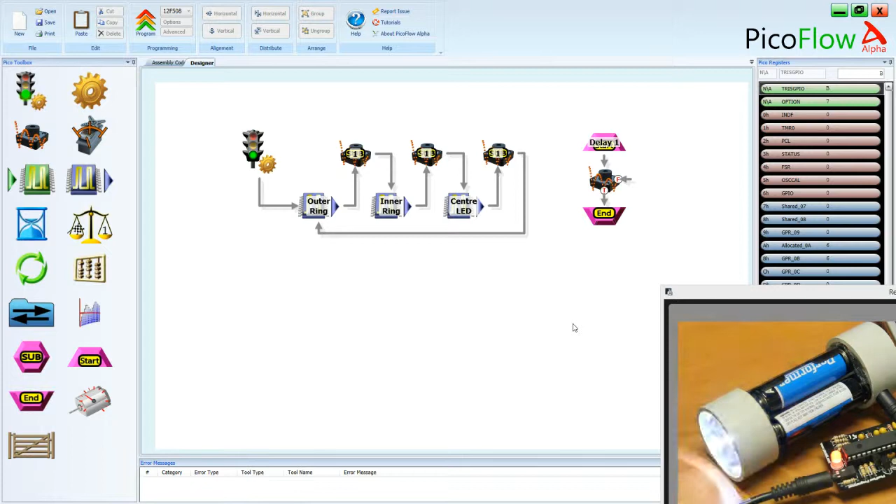Welcome! This is tutorial 5 on the Pico Bright, and today we're going to have a look at how to put a switch in a subroutine instead of a delay. So let's open up the previous code that we used, tutorial 4, where we put a delay in a subroutine.

So putting a delay in a subroutine, as we said last time, has a great effect of you being able to update all of the tools at once. So we've got 6 delays up there, or 6 subroutine tools, and they all call this one delay. Now, in that subroutine, each time it gets to the end, it returns to the respective subroutine that called it.

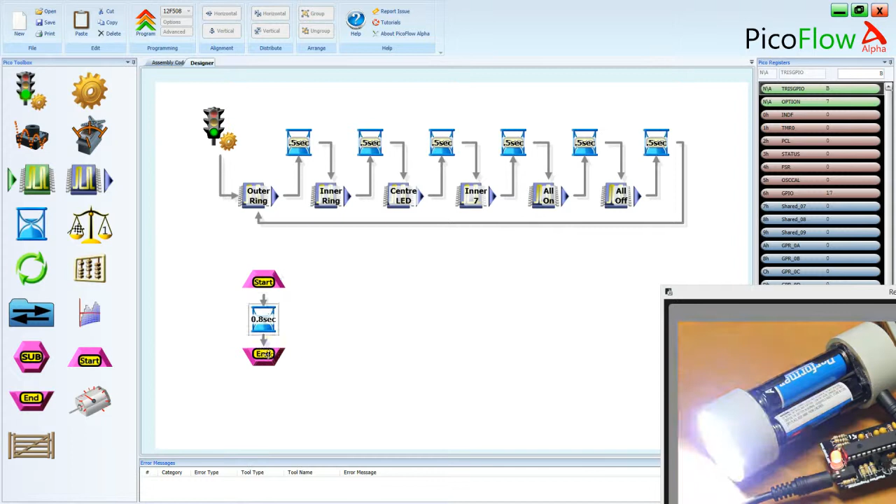And the thing that enables an MCU, a microchip, to work like that is it has a thing called a subroutine stack. Every single tool has an address, so the address of this call is put on the stack, and then it goes to the new address of the new tool, and it gets to this return or the end tool, and it says, okay, let's pop that address back off the stack, and then it sends it back to this address. And so each time it gets to the different subtool, it lists that subtool's address on the subroutine stack, and so it knows how to return to that subroutine that called it.

Okay, but let's have a look at our switch tool. Now this switch tool is pretty handy. It can be set up a couple of different ways. The way we want to set it up for this one is as a stopping switch, which means it's going to stop on the switch, and when the switch changes state, that's when it actually goes on to the next state. So instead of having a delay, it's going to be an infinite delay until a switch is pressed. So we can hook that up, and we'll hook up the bottom one.

Now we need to change the false and true around, because true means that it has changed states and false means it hasn't changed. So we'll put false on the left and true on the bottom, and we're using RB3, so that's right, and we'll look for a switch press. No, switch release actually works better. Normally when you click on a switch, it's when you release it that it activates. So we'll use switch release, and we might just give it an annotation and say RB3, because that's the switch we're using, or the pin of the microcontroller.

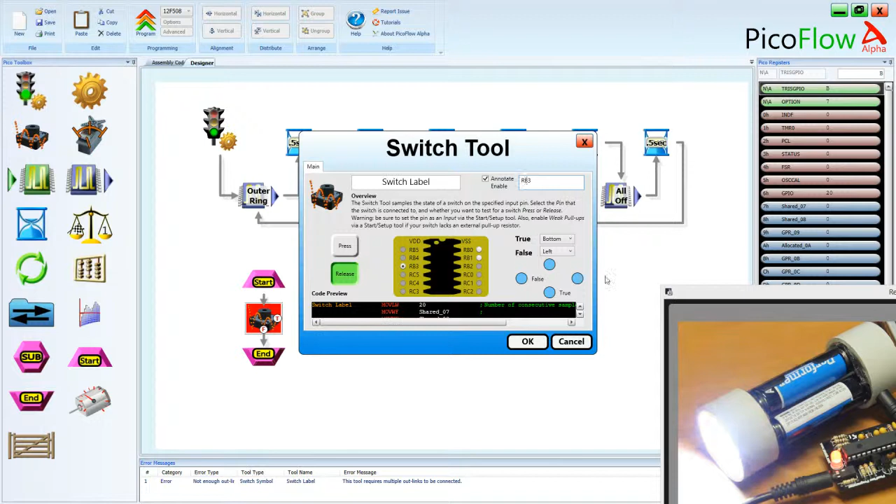Okay, now the last thing we have to do from this false, we can loop it back around to itself like that. And actually you don't have to loop it back around; you can click and drag out and then drag back in, and you can put it on itself like that. And so that's just going to continually do the switch tool until it changes state. So let's program, and we'll notice something about this.

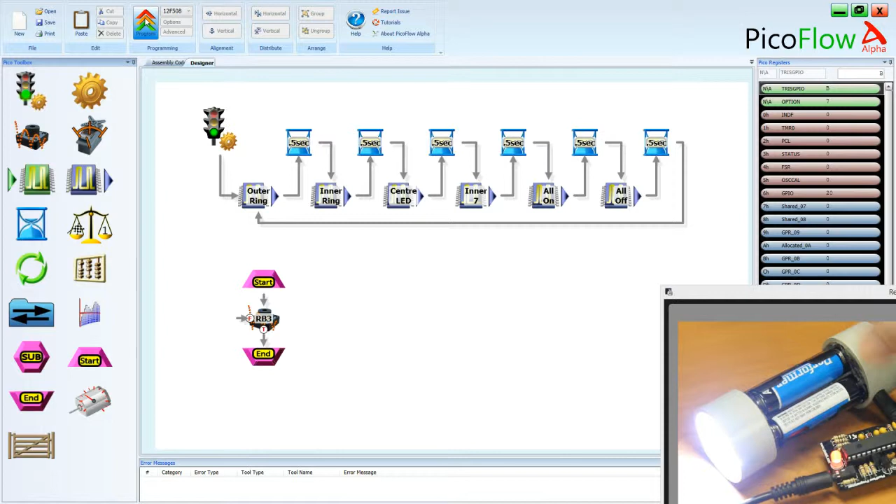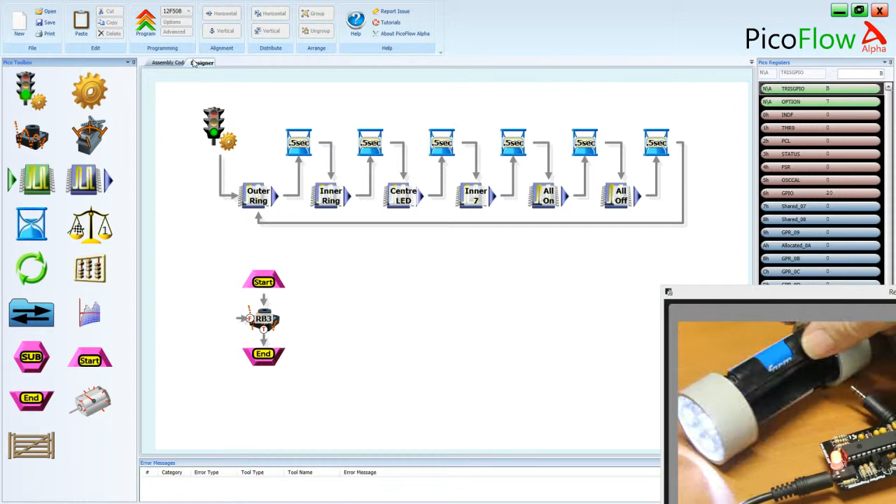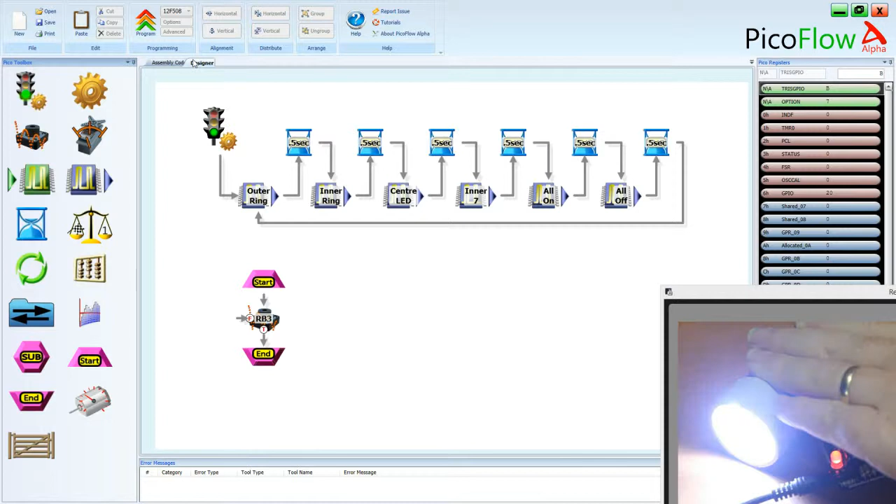Okay, so pressing the switch now isn't going to work. And the reason for that is we need to unplug the programming cable, and now we should be able to press it. There we go. And so each time I press it, it changes between those states. And it's not when I press down, it's when I release that it actually changes state. Changing states on the release has an extra benefit: it's more likely to work better. We could put it on the press, but sometimes you'll get a bit of a shake in the switch, and electrically it will contact a few times, and so it might skip through.

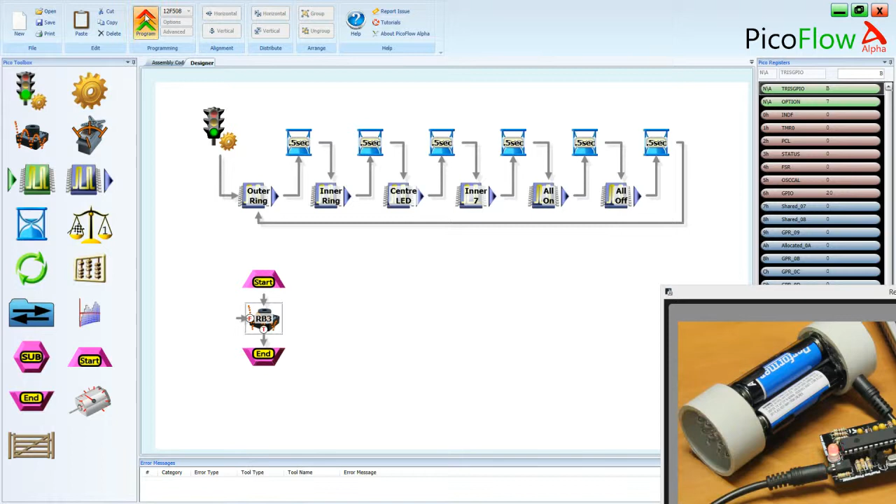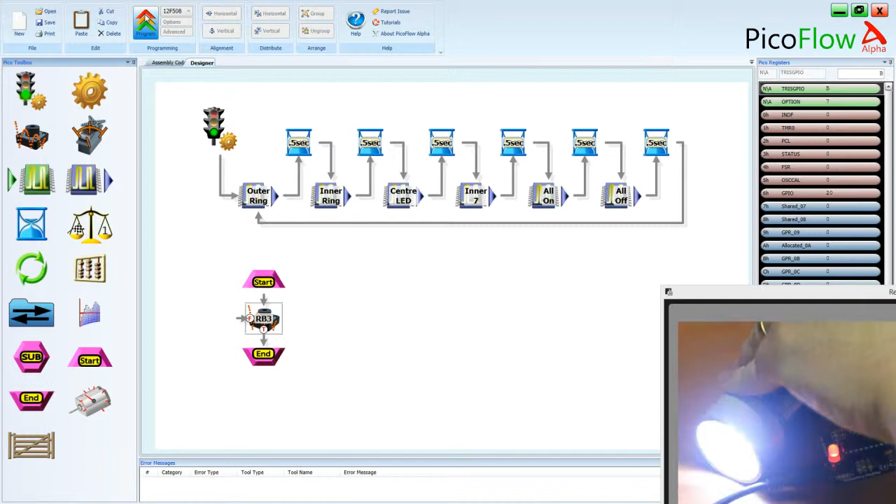So I'll show you the difference if we plug it back in and program. Okay, now we'll unplug it. So now it's changing as I click it instead of as I release it. And that's the difference. But sometimes if I wiggle around on that, actually it's working really well at the moment, but sometimes it will actually trigger twice instead of once.

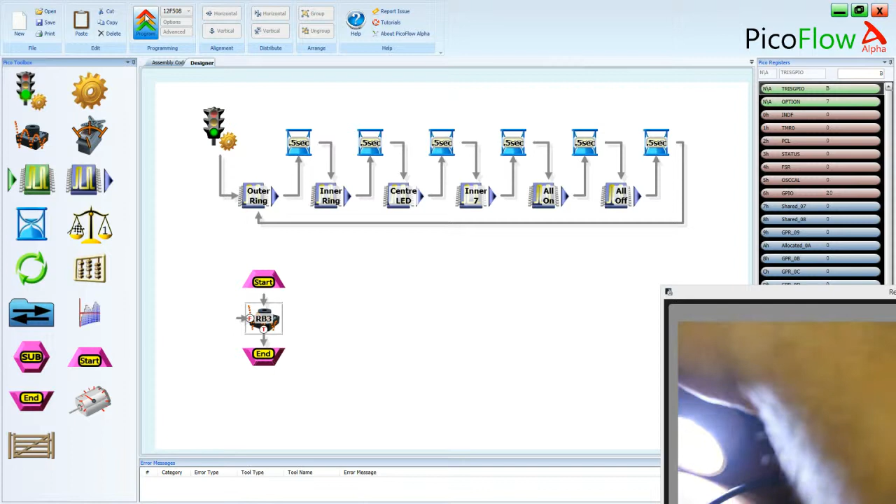Okay, so that's how to put a switch in the subroutine, but if you want to make it look nicer, of course, we've still got this listed as a delay. And so we can change the background image of the subroutine so that it looks like a switch. And obviously we'll change the annotation as well. We might just turn the annotation off on that one. Okay, so we can go through and do that for each of the backgrounds.

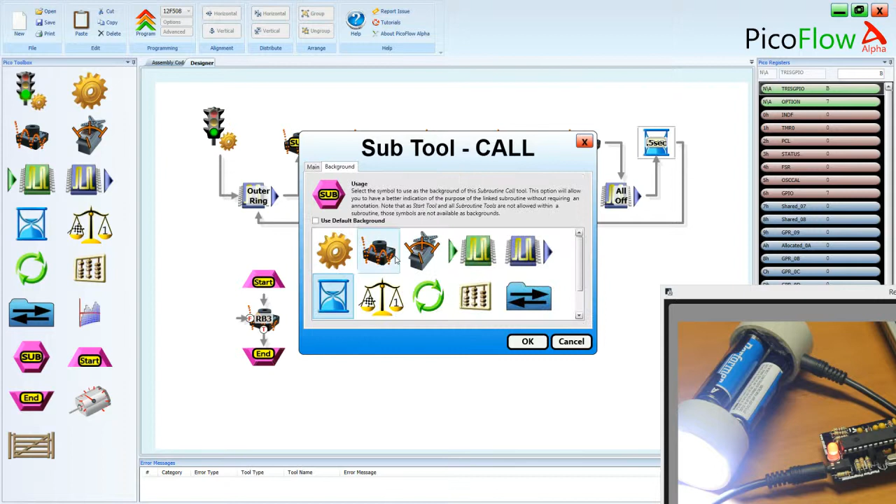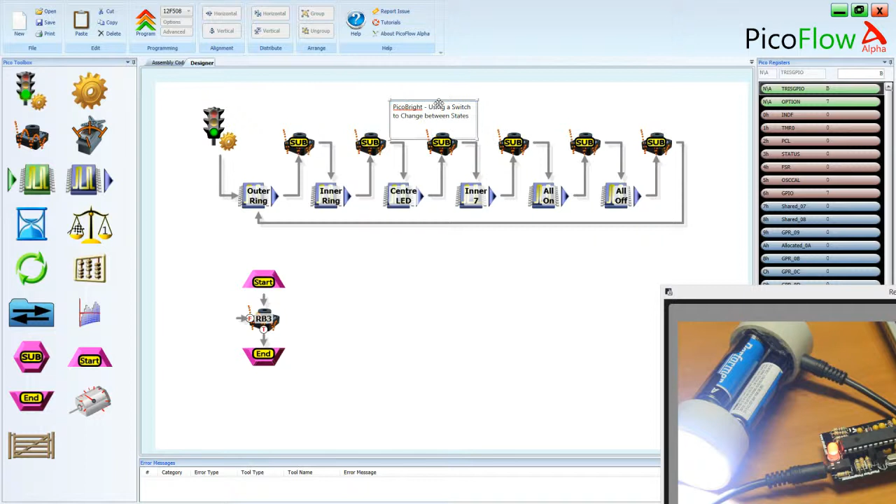And we might just put a label on here, create a note: PicoBright, using a switch to change between states. Okay, that's what we're doing. And there's a couple things I might show you in using the notes. We can actually change the format of the text to make it look a bit nicer. We can make it a different size, we can make it bold, and we can change highlight colors.

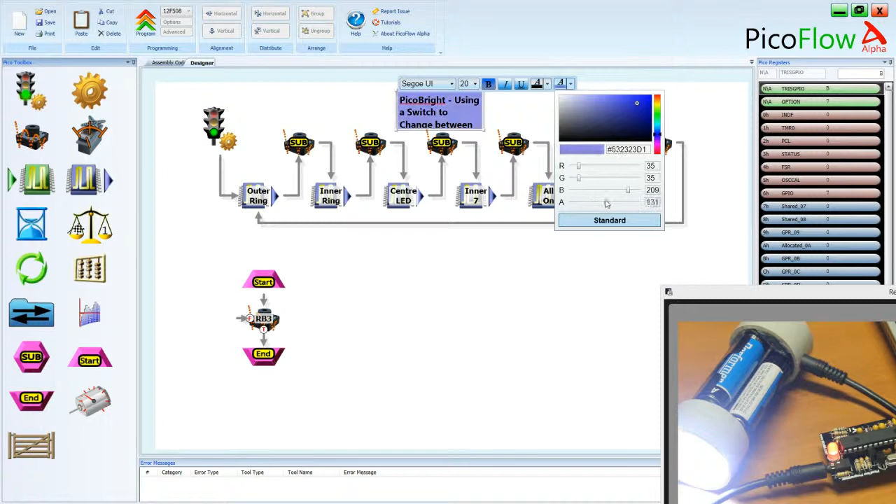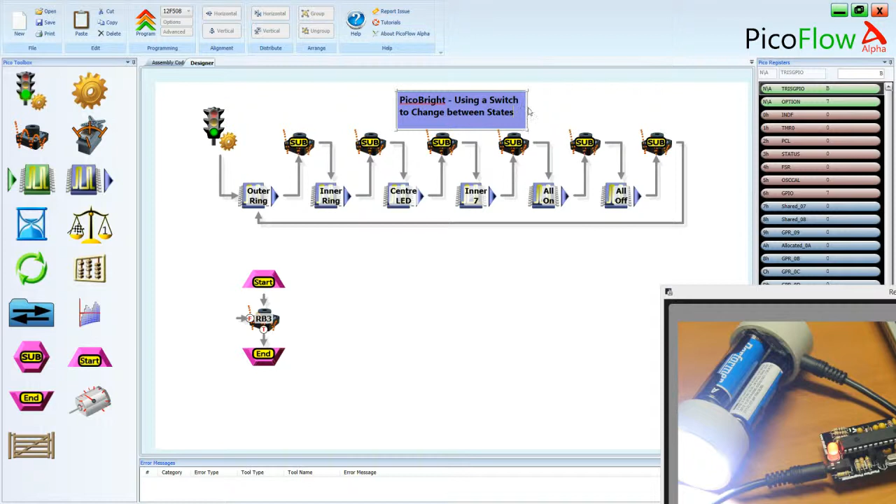Go to advanced, and let's choose a color in here somewhere. There's a color in there. We've got this alpha, which is like a transparency thing as well. And if we go back, there it is, updated. We'll change the size. There it is. And we've got our nice title block at the top.